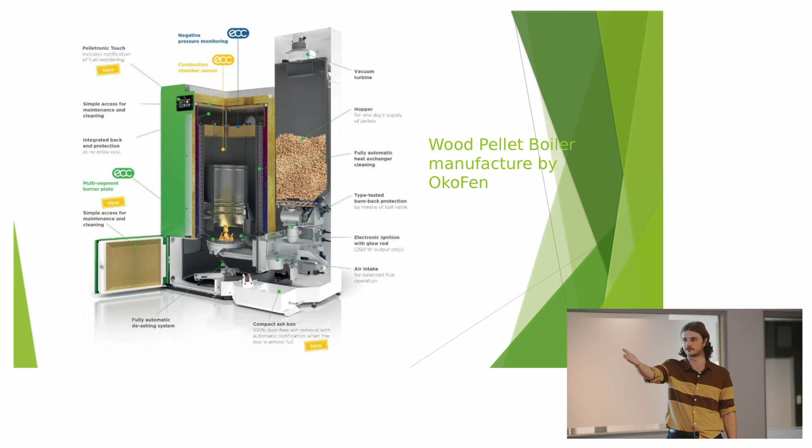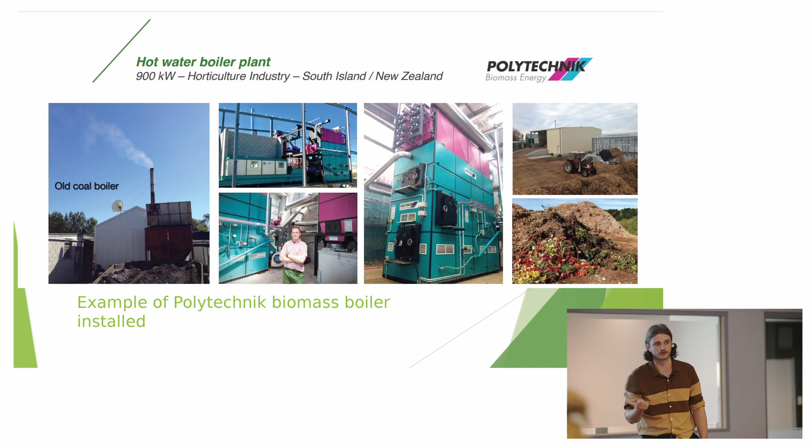And then Polytechnik, another one who've worked in the horticulture industry before. So they've done quite a few of their wood chip boilers around in the horticulture industry and around in Australia and New Zealand. That's right? Yeah, we've done 10 large installations in Australia and New Zealand.

If I just can add something, none of our customers burn wood chips or pellets. They burn forest residues and hog fuel and sawdust and whatever is a residue, because they are often substantially cheaper than the high quality fuels. Yeah, that's a good point.

Time Bank down south, they are an operation that use pine nut shells to burn, so you're right, there are different options besides the wood chip and wood pellet that can be considerably cheaper if you build that relationship with someone who has a significant amount of waste biomass fuel to use that as an option. So it's definitely worth exploring.

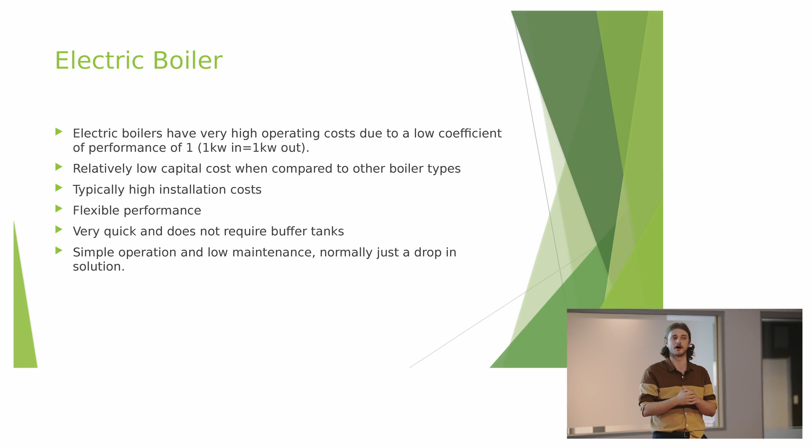Electric boilers. So electric boilers have popped up in some of these consultant reports. They haven't been recommended as much as, say, the biomass or the heat pumps that I'm going to talk about later, mainly because they have quite a high operational cost, because electric boilers put out as much as you have to put into them. So when you compare it to a heat pump, you'll put 1 kilowatt of electricity into it, you'll get 3 kilowatts of heat out of it. And I'll explain more about how that works later.

They do have a lower capital cost than heat pumps because a lot of them are just pre-bought units, so you can just stick them in and they'll run. They are very easy to use, very simple, very quick responding. You can go from 0 to 100% to 50% to 10% in a very short amount of time. And then low maintenance. So those are some advantages, but the high operating cost and the infrastructure upgrades that you could potentially need, like transformers, line upgrades, things like that, make them a bit more difficult as well.

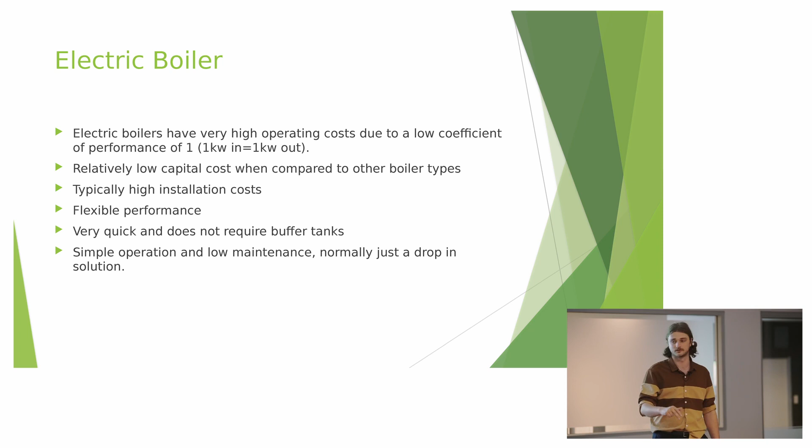Air source heat pumps. So air source heat pumps are always one that are looking very, very promising. Air source heat pumps you can either use to generate hot water so that you don't need to replace your full system, or you can use them as air blowers where they'll be just blowing hot air straight into the system. So again, a high capital cost. Prices range from 16 grand for a 15 kilowatt unit to decking out a 330 kilowatt site for $500,000.

You get low operating costs due to the high coefficient of performance. So the electricity you're putting into a heat pump is going into compressing. The heat you're getting is mainly coming from the air as a fuel source. So you'll put in 20 kilowatts of electricity, you'll get out 60 kilowatts of heat. So they're actually operationally quite good for your electricity bill.

You can have lower infrastructure costs, but again, depending where you are and how good your electricity supply is, it can still be quite difficult and expensive to install the new transformers and get the line upgrades. They can be used for cooling as well as heating, so this is a huge advantage for some sites depending on where you are, because I know that some of the sites have had serious problems with their produce overheating, so this is a good benefit.

Vulnerable to power outages, that is an issue, especially for some people we've seen down in the South Island, where in the more isolated areas they have power outages, and because of that they need diesel generators. Obviously that's not preferred, but that is a weakness.

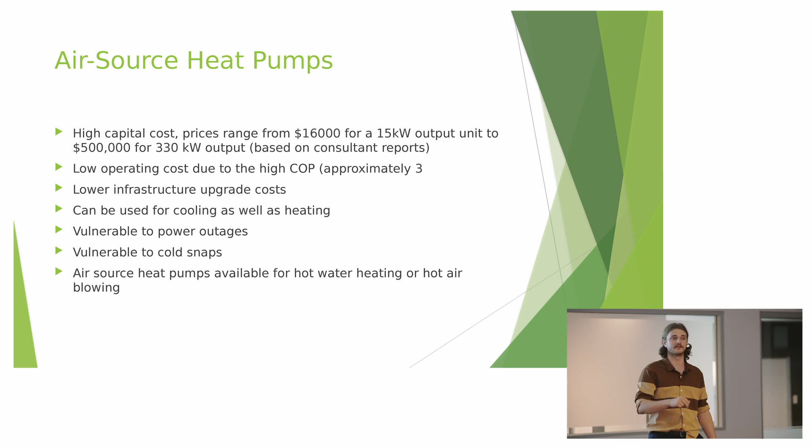Vulnerable to cold snaps, again this is maybe more for the South Island, but these air source heat pumps will work up to about -5 degrees Celsius. If they go lower than that, then you'll lose quite a lot of that efficiency, but if you get down to -5, you'll still be getting a coefficient of performance of about 2.2. So you'll still be putting in 5 kilowatts and getting out like 12. So it's still not too bad.

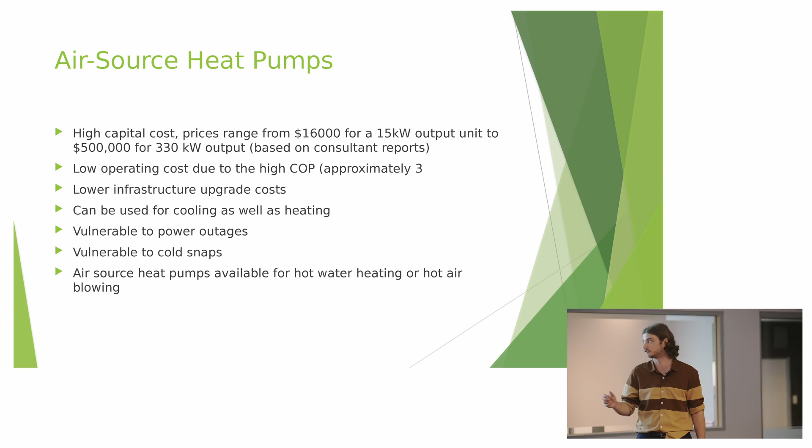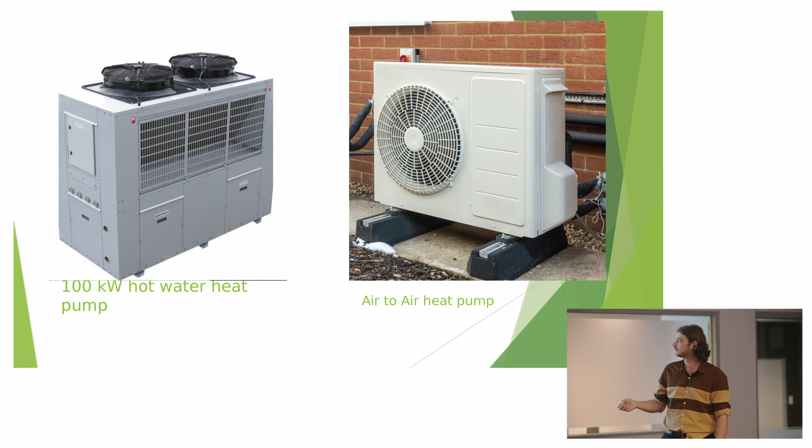Next, please. So yeah, you got the 100 kilowatt hot water heat pump, and then your air-to-air heat pumps, pretty standard. Next, please. Ground source heat pumps. So ground source heat pumps use the reasonably consistent temperature in the ground as your heat source. So normally, depending on how deep you go, you can get consistent temperatures of 14 to 20 degrees, even higher depending on where you're located.

The other thing that some people have done is they've used maybe a body of water for a heat source. So by using that body of water as a heat source, you can get a much more consistent performance. Very, very low operating costs because you are using such a high temperature source for your heat pump. You get very high COPs. So if you're putting in 20 kilowatts, you can get up to 100 kilowatts to 140 kilowatts out into your site. Again, can be used for cooling like the air source heat pumps can as well. Has many of the same advantages.

The design can get quite expensive because they do have to, in some places, drill quite far down. Works in all climates and is consistent when compared to air source heat pumps. And then there can be less electrical infrastructure upgrades as well.